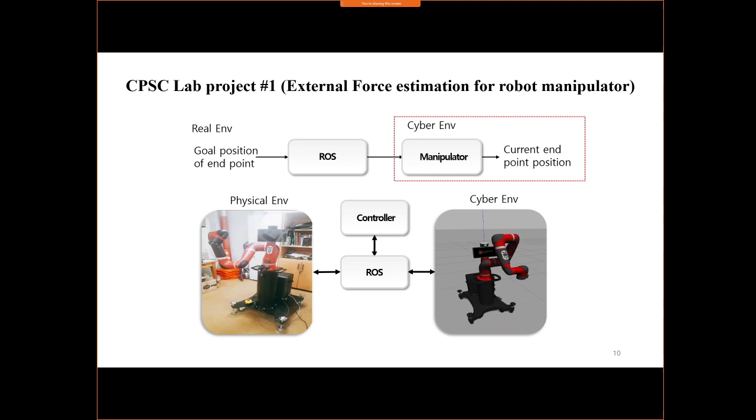Then applied to a real robot to quickly complete the project. In this way, the cyber-physical system approach helps shorten the development period. When I was in my PhD course, it took 1 year to prepare and set up the environment, but nowadays we can develop this kind of system very quickly.

As mentioned earlier, modeling is the first and most important thing in dealing with a cyber-physical system. In order to control the robot, it was first necessary to obtain the kinematic and dynamic model of the complex robot, such as inertia, Coriolis force, and gravity force. The computer was programmed to understand the robot motion using mechanical engineering methods. Detailed explanation will be omitted here due to the short time.

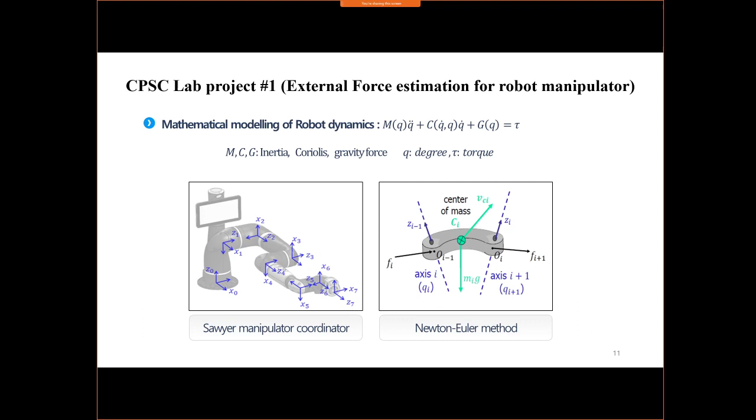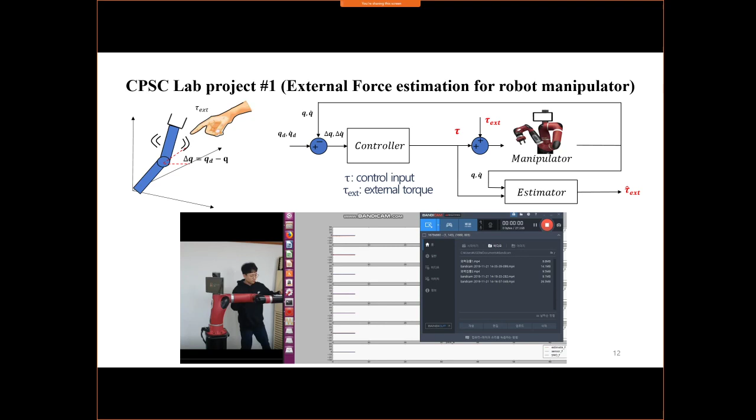As you can see in this video, each of the 7 joints' external force can be estimated, not directly measured, using our technology. With these technologies, if a robot lifts an object without any force sensors, it can automatically calculate its weight.

So we can apply this in various fields. Based on control theory, we can estimate various physical quantities without any sensors.

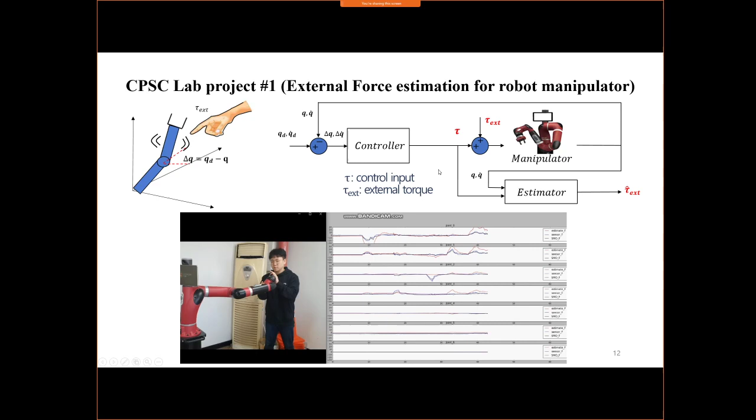The second case is the application of control theory to autonomous mobile robots. In order to implement autonomous mobile robots, many sensors such as LiDAR, camera, and motor encoders must be used. However, each sensor's sampling time is different.

So by using fusion of these sensor measurement data, we can accurately know the state of the system to perform the nominal task. Therefore, in this project, we were able to accurately obtain the current position and speed of the mobile robot by designing an observer-based estimator for the system with multiple sampling times in the camera and encoders. So we achieved a successful project.

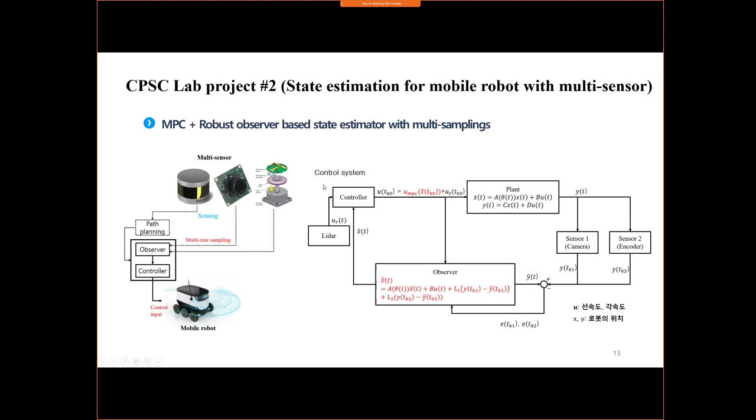Before applying it to the real system, we simulated it in a virtual environment and developed an algorithm that avoids obstacles using LiDAR. As shown in these videos, you can see it resembles the real system. We applied this in the virtual environment.

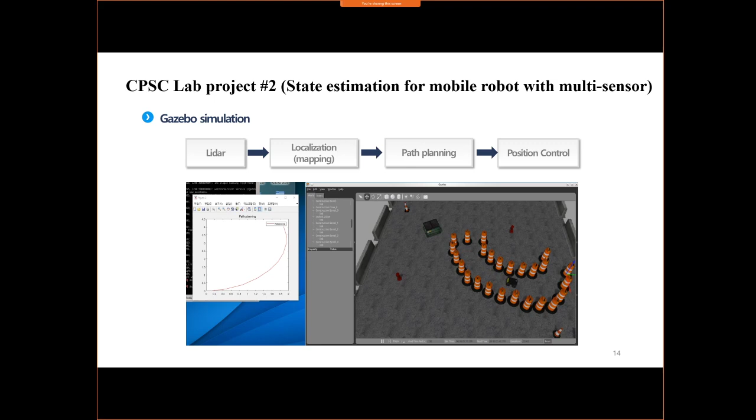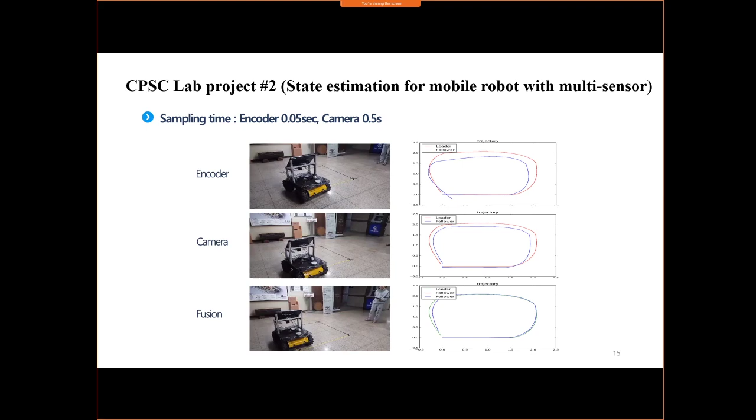This video is an experiment on the task of tracking given trajectories, and it shows that when using the proposed sensor fusion, tracking control is more improved than when using each sensor alone, only the encoder or only the camera. The encoder is easy to use for controlling positions with fast sampling time, but has a disadvantage in that large errors occur when a slip happens on the floor.

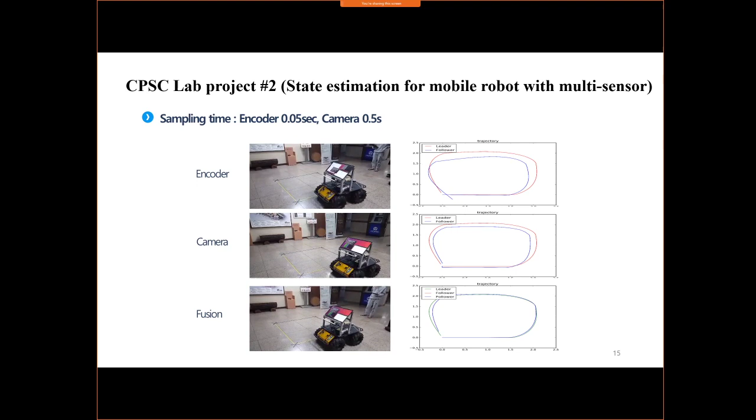On the other hand, the camera uses a technique called visual odometry, which is easy for detecting change in its own position, but has a disadvantage in that it requires a lot of computation. So we combined the two sensors using a fusion technique in this project, and you can see the improved trajectory tracking performance.

From now on, I will explain the recently developed control method for TS fuzzy systems.

All systems are expressed as nonlinear systems, and in order to systematically deal with these nonlinear systems, there have been many studies on parameterized systems, such as TS fuzzy or LPV system, linear parameter varying systems, a long time ago. Such a parameterized system is expressed as a linear combination of the linear subsystem at each operating point. In this case, if you know the nonlinear functions, you can use the weighting function theta that is multiplied by it.

Let's consider the example of a joint robot, as a single link robot with a flexible joint. That system is expressed as first order differential equations. Here, sine functions are included. This nonlinear function is expressed as a linear combination of two linearized values, b1 and b2, by using fuzzy logic.

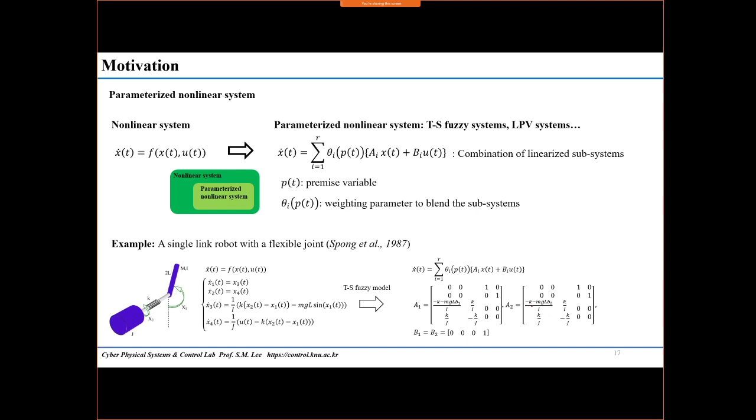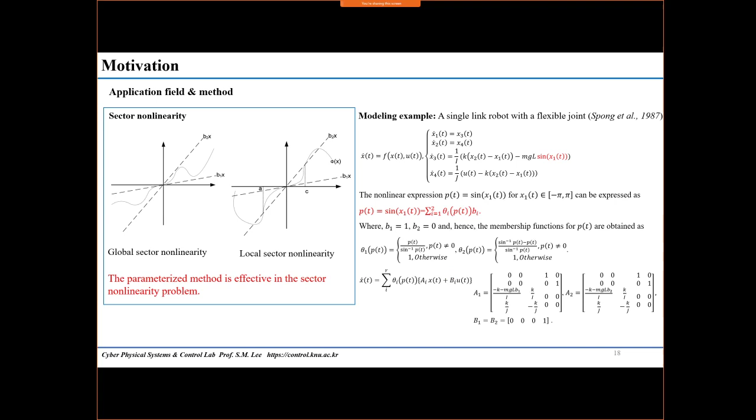If these nonlinear functions are expressed in two sectors across all areas, it will be analyzed as global sector nonlinearity. And if the sector condition is satisfied only in the special section from A to C, it should be analyzed as local sector nonlinearity. The sine functions can be expressed as a parameterized system using the membership function of fuzzy, a variable between sector 0 and 1, and analyzed as global sector nonlinearity. It is called the Takagi-Sugeno fuzzy system.

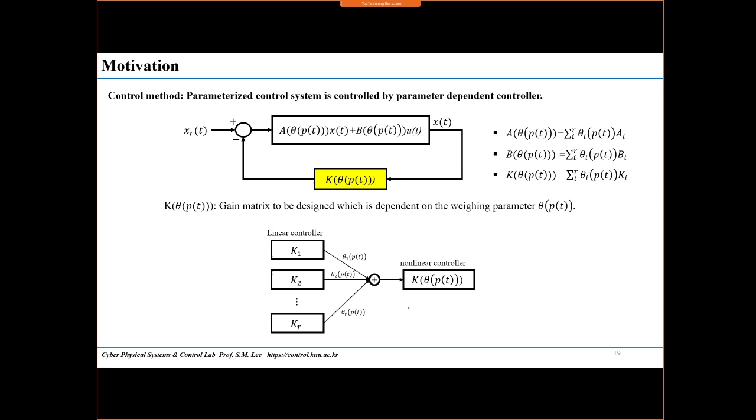In our study, we focus on finding a systematic way to design the membership function dependent controller using these fuzzy membership functions. So the controller is also expressed as a linear combination of each control gain. Here, the control gain is expressed as a linear combination of each local controller in fuzzy logic, like that.

The aim of our study is to find a relaxed design condition for four topics of these parameterized nonlinear control systems. The first one is to find the absolute stability condition that satisfies the sector constraint. The second is to relax the sampling time for sampled data, to reduce the network burden of the network control system. The third is to increase the maximum delay time in the time delay system. The fourth is to improve the H infinity performance to reduce the output norm against disturbance.

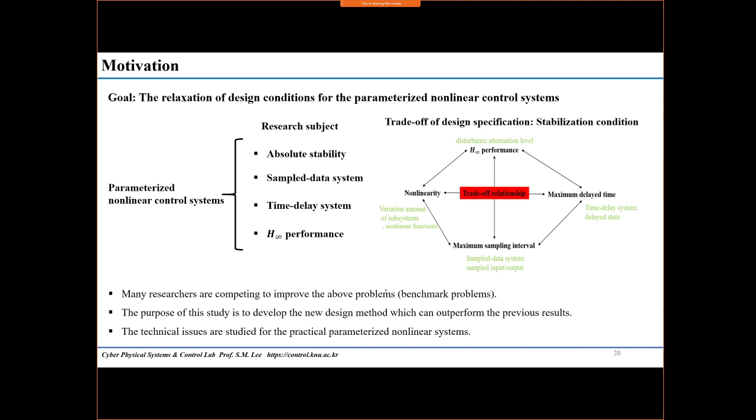These four topics are in trade-off relations with each other, and improving one side degrades the other side. For example, if one wants to increase the nonlinear sector, the H infinity performance deteriorates. So many researchers are competing to improve the above problem with the benchmark problem. The purpose of this study is to develop a new design method which can outperform the previous results.

Our research topics are largely divided into two categories. The first is designing parameter-dependent controllers, as shown in this upper figure, for parameterized nonlinear systems. The other is designing a parameter-dependent filter for estimating the state of the systems, which also uses a parameter-dependent gain.

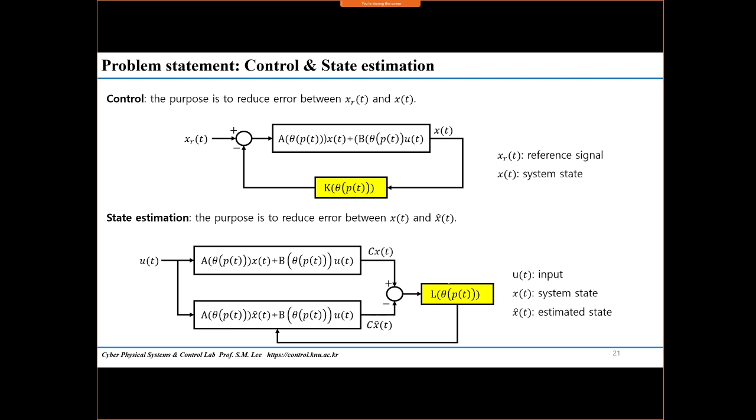There has been a lot of research on this topic in the last decade. It can be grouped into three representative types related to our research work. The first is the use of the parametric LMI technique, which was proposed by Apkarian around 2000. And recently, my research work was published in 2018 in IEEE Transactions on Fuzzy Systems.

The second method is to use modified fuzzy membership functions. Representatively, the imperfect premise matching method was proposed by H. Lam. Performance is improved by using different membership functions in the original system and in the controller.

The third one involves studies to improve the time delay and sampled time by using new Lyapunov functions and integral inequality conditions.

So our main issue is how the information of the system can be utilized under parameterized conditions, and how to derive the condition by constructing parameter-dependent Lyapunov functions. Also, the main issue is how to obtain the parameter-dependent gain in the controller and estimator, and how to deal with the asynchronous sampling problem for the parameter as well.

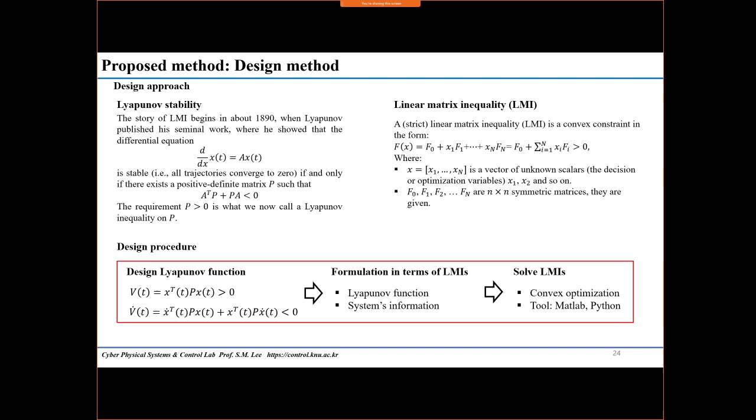In our studies, the system was developed while guaranteeing stability based on the Lyapunov function, and the problem was formulated using linear matrix inequality techniques. All design variables are expressed in the form of a convex function to ensure global optimization. So our approach has an advantage: the simulation can prove the given problem without any experiment.

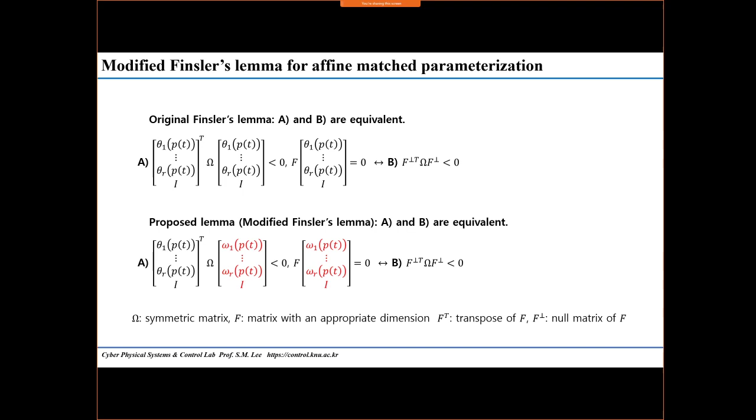To apply the proposed method, we proposed a new Finsler's lemma. The first equation is the original Finsler's lemma, which is well known, showing that two inequalities expressed with parameters, the equation conditions A and B, are equivalent. However, since the proposed method uses transformed parameters omega in the controller, it is expressed as inequalities that include a new parameter, which is provided by the new Finsler's lemma.

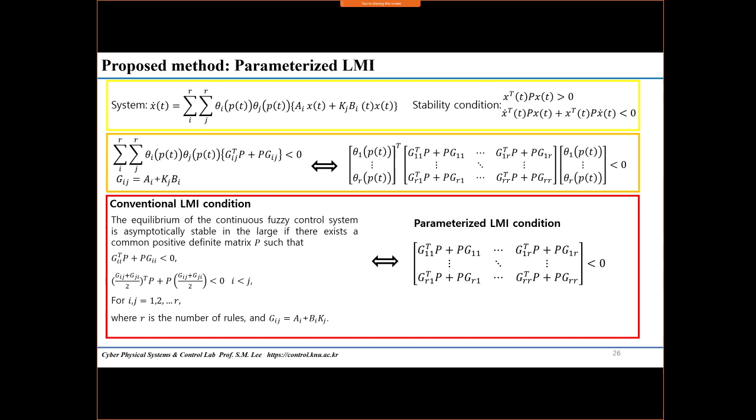When affine transformed membership functions are expressed as omega equals alpha theta plus beta, the affine transformed membership function is used in the parameter-dependent controllers. We use different membership functions. It is expressed as a new variable w, which is obtained by transforming the existing membership functions with constant alpha and beta. The reason for doing so is that the constraint can take advantage of information.

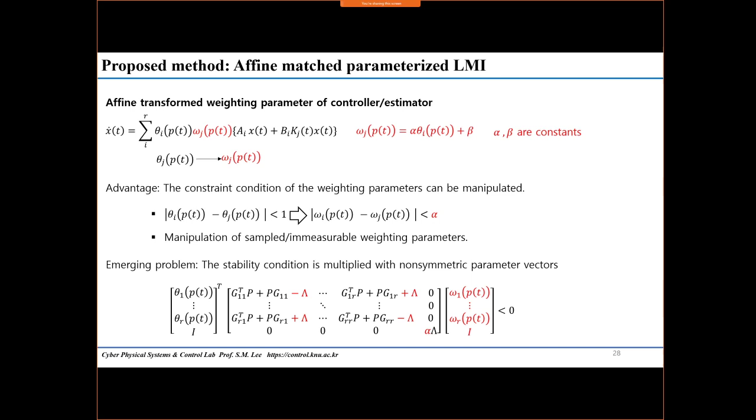Actually, for the parameter theta i and j, the difference value is bounded by 1. But our proposed transformed parameter omega i and j is bounded by alpha because constant beta is eliminated. So we can reduce the upper bound. So the difference between the membership functions is limited to alpha. In the parameterized LMI conditions, alpha is included in the last terms, as shown at the bottom of the equations. The last term contributes a lot to relax the design condition. This is the main key idea.

By using the ideas, we developed stabilization conditions for T-S fuzzy systems. This paper is published in the IEEE Transactions on Fuzzy Systems in 2018. From these pages, various applications based on our ideas are introduced.

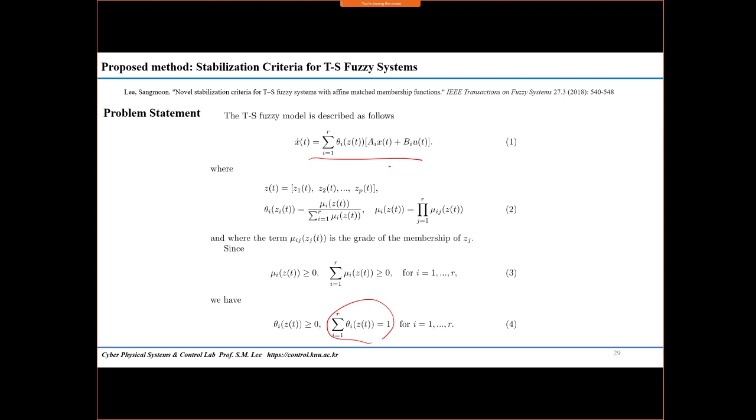So we consider the T-S fuzzy systems, generally formulated as the control system. The parameter summation constraint is expressed as shown. And we consider the parameter-dependent controllers. Here, psi is affine transformed with alpha and beta. So the closed-loop system can be expressed with index ij, theta, and psi. So our parameterized techniques can be applied.

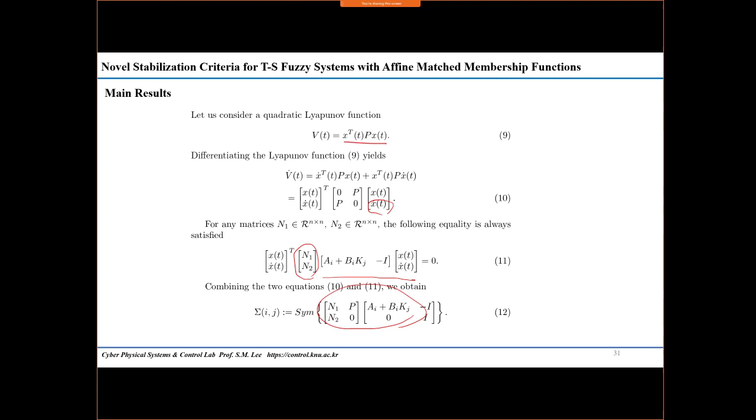Based on the common membership functions, we can derive the stability conditions using x dot terms. So we can derive the equality conditions. Differently from existing methods, the full block free matrix can be applied, multiplied in the equations. So by combining the two equations, we can obtain the stability conditions with ij index. So by combining the membership function and system information, we can summarize as these equations.

The first term is the i terms, and the second term is cross terms. So in order to parameterize, we rearrange this cross term. So by using alpha and beta, we can reformulate the parameterized inequality conditions.

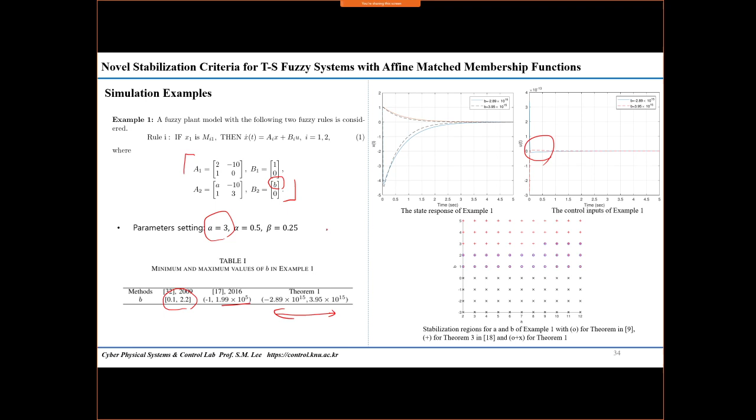So in the simulation examples, we can find the improvement of simulation results when we consider this kind of fuzzy system. Consider the fixed parameter a and how to enlarge the parameter b for satisfying the stability. Current existing results can increase the region of the parameter b within these values. But our method remarkably increases the region. I could not believe it at first, but after simulation, we can show it is stabilized, and we get the enlarged stabilizable region. So when we utilize parameter variations, we can remarkably improve.

The idea also can apply to sampled-data stabilization for T-S fuzzy systems. This work is published in this year's Journal of the Franklin Institute. So generally, in network control systems we consider aperiodic sampling intervals. So the parameter also should be sampled. So for the different ij index membership functions, different affine transformed membership functions are considered.

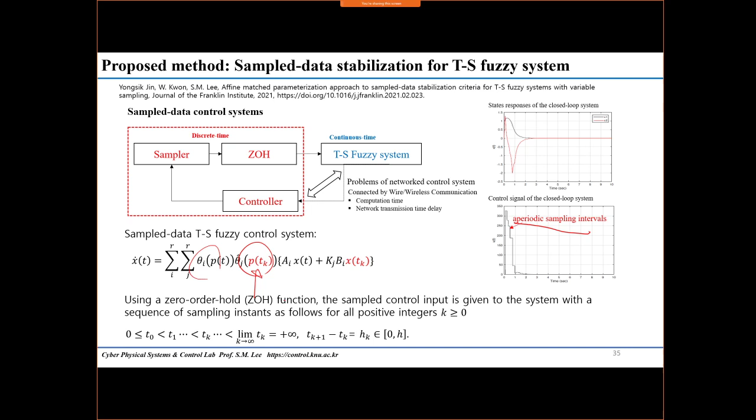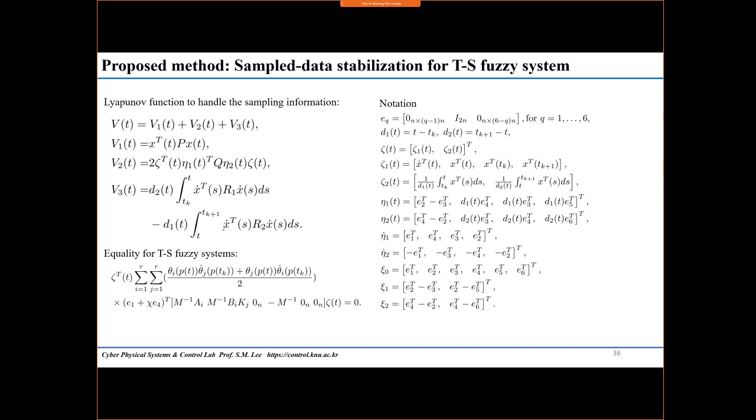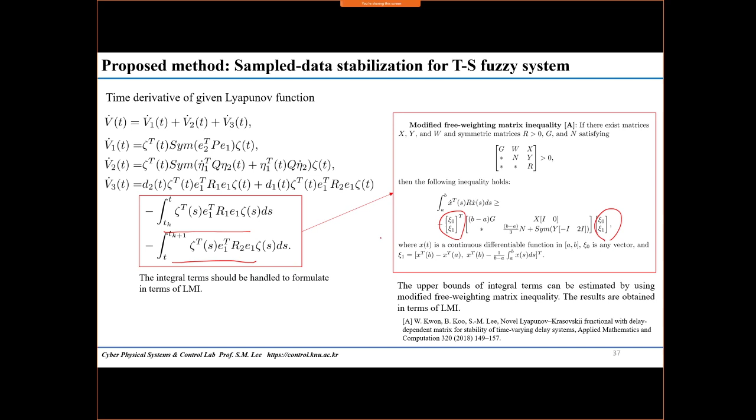So in order to handle the sampled-data system, we consider Lyapunov-Krasovskii functionals. After deriving the derivative of the Lyapunov functionals, we can derive the stability conditions. Here, we encounter these kinds of integral terms. This term can be bounded by using integral inequality conditions. It can be described with the existing vector. So by using integral inequality conditions, we can find stabilizable conditions. Detailed proof can be found in these papers.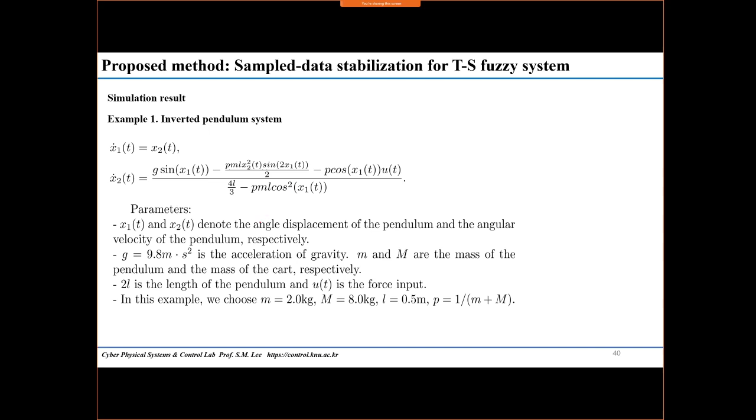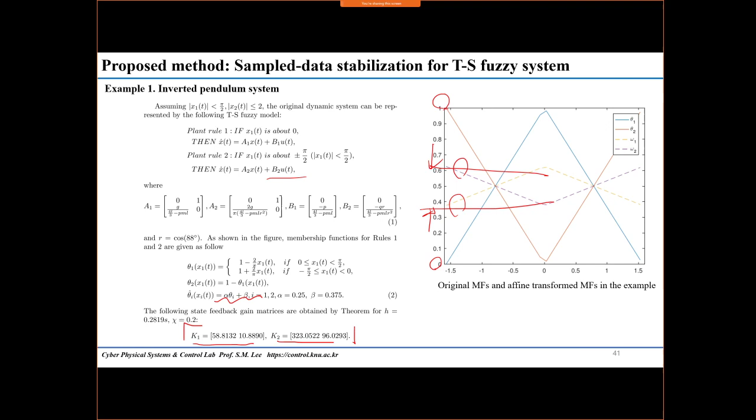So we can obtain this kind of control gain. Actually, when we solve the TS fuzzy stabilization problems, the gain becomes a similar gain, but in our studies, different gains are obtained by using our affine transform technique. So this value shows our improvement.

Even though the sampled time is 0.2819, the meaning is the inverted pendulum can be stabilized even though the sampling time is 0.2819. A very long time can be stabilized. This simulation shows the successful stabilization well. Existing works just obtain within 0.04. We improve about 5 times.

This work we can also apply to estimator design in static neural networks. We also utilize this to design the parameter dependent gain, so it is called parameterized Luenberger type estimators. This work is published online this year in Neural Networks and Learning Systems. Considering these static neural networks, we try to find the stability conditions for large slope bounds and for time delays, to increase the time delay.

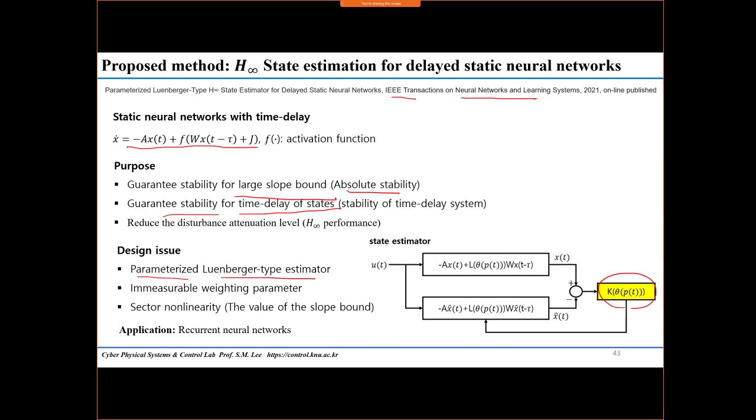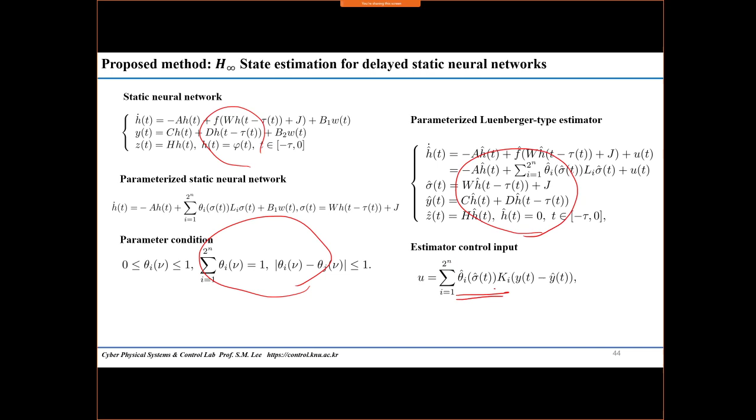The left side is the originally considered neural network system and some constraints. We want to design parameterized Luenberger type estimators. Here, the gain is parameterized. When we consider this very popularly used example, comparing the H infinity performance for different values, lambda is the maximum upper bound of the nonlinearities. When the numbers increase, the H infinity performance increases, but our result is superior to the existing works.

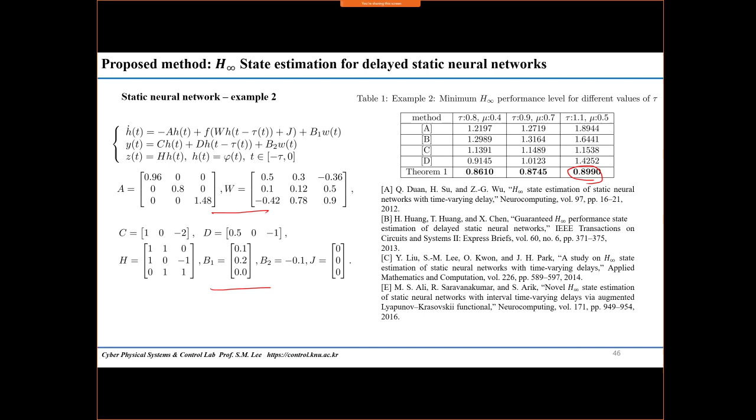Also, the H infinity performance can be compared with different values of time delay. For our proposed method, this value is the H infinity performance. So even with large time delays, we can get improved H infinity performance, so we can resolve this trade-off. This is the second example. This example is also a well-known benchmark problem. We can get smaller H infinity performance compared with recent published papers.

Now I will conclude all of the works. We propose improved design methods for parameterized nonlinear systems, TS fuzzy, or linear parameter varying systems. In order to relax constraints on nonlinearities, maximum time delays, and maximum sampling intervals, and to improve the H infinity performance, we apply parameterized techniques using sampled weighting parameters. Also, immeasurable weighting parameters can be applied in our techniques. By using the benchmark problems, our superiority was verified.

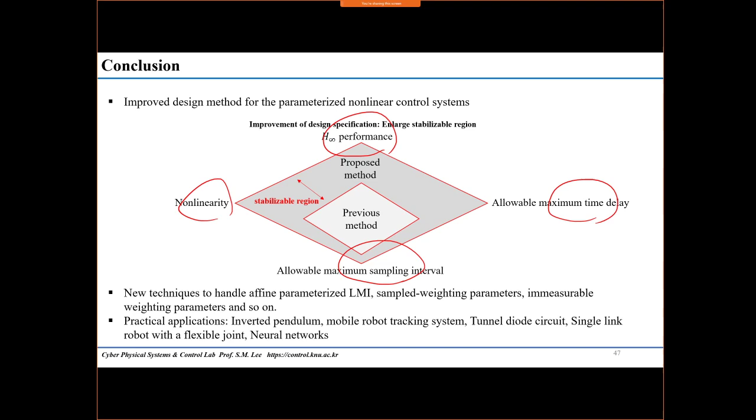Oh, it's really a good result and interesting. Thank you. In fuzzy systems, in 2021, there is a good result in TNN. Yeah. After this report, I will download the paper to study. Yeah, you can download it. If you need some example code, I can support you. Okay, thank you very much.

I will introduce you to another professor in our college, Prof. Liu. Hi, can you hear me? I can hear you. Hi, Professor. Sorry, I don't have a camera at hand, so I just use voice. No problem. I listened to your talk and find it very interesting, and the fuzzy algorithms seem very powerful. Yes, for a lot of problems.

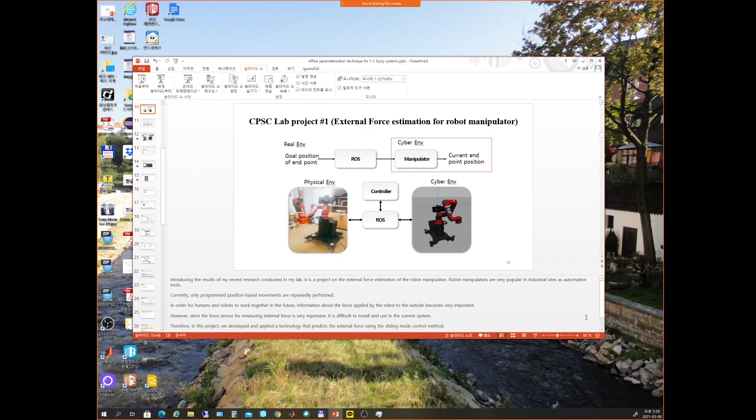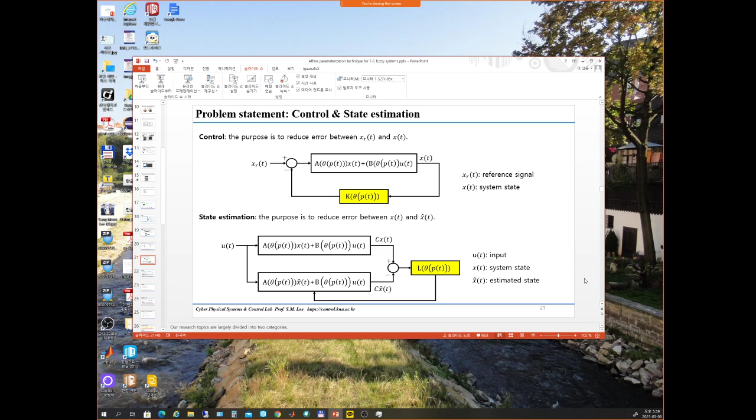I have some other questions. When the fuzzy control approach is applied, you have studied different sampling periods and sampling intervals, and systems with time delays. Is there an explicit bound for these time delays or sampling intervals that the fuzzy control approach can handle? I didn't see this bound in your presentation.

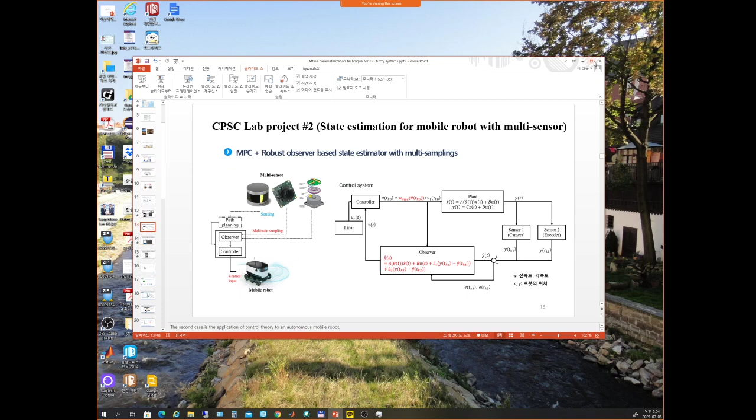Okay, I have one question because I'm interested in your model predictive control. Please put on your slide from before. Maybe there is a mobile robot. In this work, we utilize MPC. Yes. And I saw the controller is a composite controller, including the MPC, and what is the other controller? You are so smart. This is a very important concept.

Actually, when we try to solve the stabilizing problem to arrive at some position, MPC is enough. Right? And in this problem, we should solve the tracking problem. So based on these control inputs, we cannot solve the complex motion. So in order to follow or avoid the obstacle, we make another control input based on the LiDAR. So we add another control input generated from the LiDAR data.

I see. So the concept is similar to when we consider nonlinear systems, we should utilize the operating point control input U0 plus Kx. So it plays a role as an operating point shift. Can you understand? Okay, I see. It means the u_L guarantees the tracking errors in a small area, and the MPC treats the constraints. Yes.